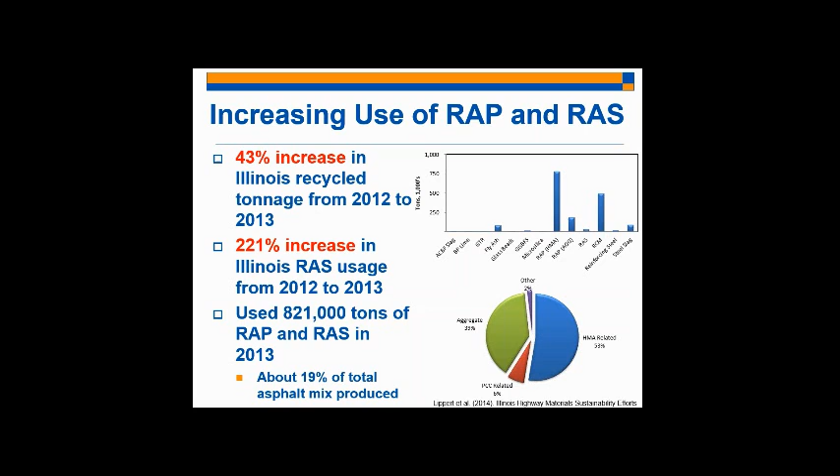Furthermore, in the year 2013, 821,000 tons of RAP and RAS were used, comprising about 19% of the total asphalt mixtures produced. So the point is very clearly made that the usage of RAP and RAS is significantly increasing throughout the United States, but also in the state of Illinois, which motivates the need to understand how this usage of recycled content affects material behavior and properties.

The project goals and overview for the study: we're attempting to identify a testing protocol that can characterize these materials with the addition of recycled content, and we want to identify very critical engineering properties of these asphalt mixtures. The final product is not limited to mixtures that have recycled content—whatever our team is developing can be used for any asphalt mixture in order to screen its performance. But the motivation for the study is the use of recycled content.

The primary distresses are fatigue and thermal cracking. We know that it's typically agreed upon that adding recycled content will embrittle your material, make it more brittle, which makes thermal cracking and fatigue primary concerns. You wouldn't expect rutting to be a primary concern if your mixture is becoming more brittle. This is why these two distresses or failure modes are the primary areas of focus.

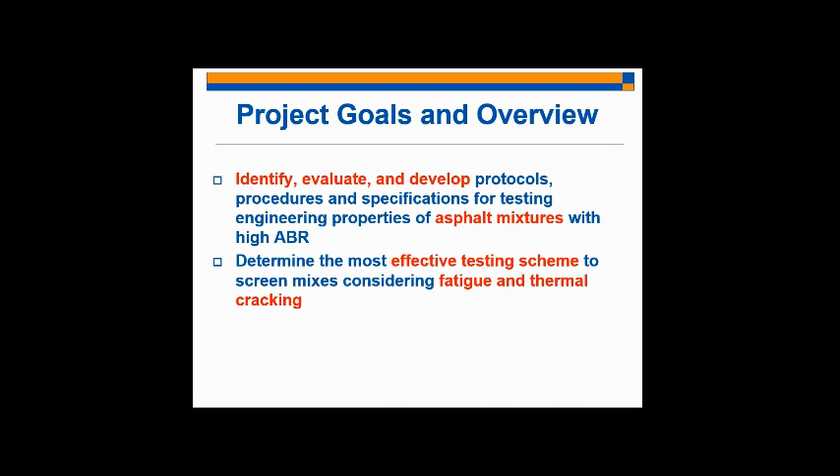When we think about developing this test to accurately screen these asphalt mixtures, there's a set of criteria we must follow. The first is that we have to have significant and meaningful spread in our test output. Regardless of how scientifically sound our research is or how theoretically backed and proven our final product is, if it doesn't do a good job of distinguishing between mixtures which we know are very different—both in terms of mix design and performance in the field—then our test is not very useful.

Second, we want to make sure that whatever product we deliver to the Illinois DOT is feasible, practical, and repeatable. It's very difficult to propose a modification to testing that is expensive and difficult to perform in the field, very complex and time consuming. Whatever product we deliver has to be cost effective, practical, simple, and easy to fabricate the specimens, easy to run the test, and easy to analyze the results.

Additionally, we want appropriate correlation to independent tests and engineering intuition. If I'm expecting, as an engineer with experience, a mixture to behave very poorly, I need my test or specification to tell me that, and I need to be able to correlate results from this specific test method to other independent tests that verify its validity. And then finally, correlation to field performance—this is the ultimate objective. Whatever we put out, the performance you're predicting in lab needs to correlate to field performance, because at the end of the day, that's really all we care about: how is the mixture performing in the field?

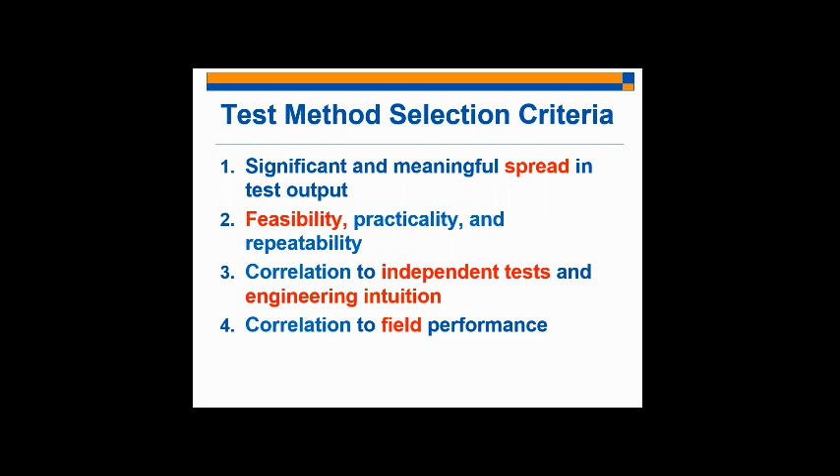Our research approach: how are we approaching this project? We have over, I would say, about 30 plus mixtures that we've analyzed in our lab, and there are three primary sources of material for this project. The first is our plant mixtures, sampled on site in asphalt plants. The second source is laboratory produced mixtures—my colleagues Puneet, Tamim, and Jose have been developing mixtures in the lab.

Been developing mix designs with varying amounts of RAP and RAS, so you can control exactly the mix design properties and see the effect of these different variables on performance. And then field cores that we've extracted from the field and tested in lab.

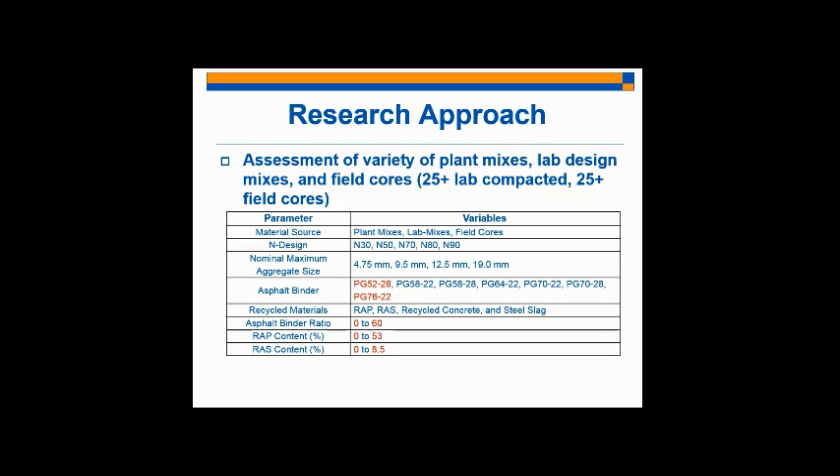We've selected the mixtures used in this study strategically—we wanted as diverse as possible a spectrum of properties. You can see from this table our asphalt binders range from PG 52-28 to PG 76-22. We have a nominal maximum aggregate size of 4.75 to 19. We have N30 to N90 design values. We have all kinds of recycled content in our mixtures—RAP, RAS, recycled concrete, and steel slag. We have asphalt binder replacement percentages of 0 to 60%, so we get pretty high up there. RAP content ranges from 0 to 53%, and RAS content ranges from 0 to 8.5%. We've really pushed the envelope with how different we can make our mixtures, to make sure that whatever flexibility criteria we develop is robust enough to analyze all kinds of different mixtures.

And so, having said this, I present to you the semicircular bending test. Most everyone's probably heard about this test. It's basically a very simple three-point bending test—it's a fracture test.

The specimens are produced from the Superpave gyratory compaction cylinders. You compact your cylinder in the Superpave gyratory compactor, remove the top and bottom portions of the pill, and then extract two 50-millimeter thick slices from the center of the pill, half them, and notch the base of each half. That results in the SCB, the semicircular bending beam test, which you can see in the figure to the top right. It's a very simple test specimen fabrication process, and the most important thing is that we can test these specimens under a very simple pneumatic load frame.

You can see in the picture to the bottom right of the slide the Humboldt load frame. This is actually the load frame used for the TSR test—we've modified the fixture for the standard TSR test. It's a very simple, cost-effective modification, and you can run the test essentially on the Humboldt load frame at a very cheap cost. This is the final objective of the project: to be able to deliver the test that runs properly on the Humboldt load frame.

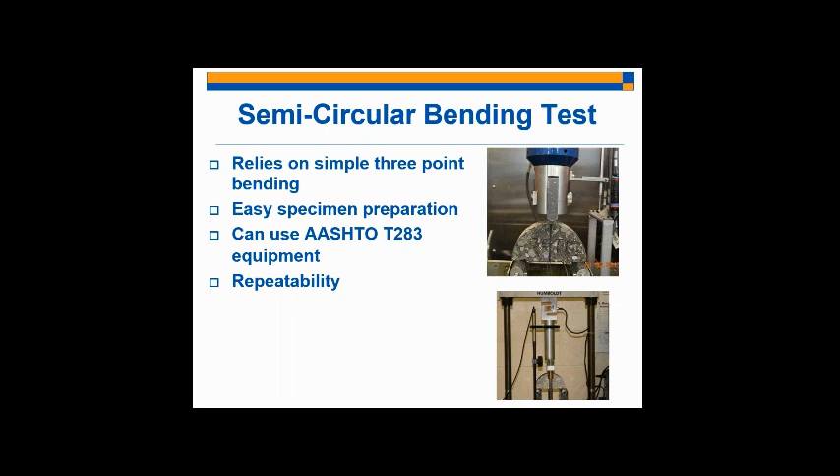In terms of repeatability, we've seen very, very good values, typically below 15% coefficient of variation—actually typically below 10% coefficient of variation. So we've really narrowed down and minimized the variability in this test. Our results are significantly more repeatable than when we started.

A little bit of discussion as to what the SCB test criteria actually is. We've taken the classic SCB fracture energy test, which is run at minus 12 degrees Celsius, and is controlled by the horizontal displacement at the bottom of the specimen. You can see the clip gauge stuck to the bottom of the specimen there.

We've taken that test from minus 12 degrees Celsius, and we've run it at the classic SCB test conditions. But we've shifted the temperature to 25 degrees Celsius, and shifted the displacement control from the bottom horizontal displacement of the specimen, which we call the CMOD, to basically the LVDT. So the test is now controlled by the linear variable differential transformer, shown to the right of the figure. It's basically just a vertical displacement that controls the displacement rate of the test.

After a screening of different displacement rates, we've tried rates ranging from 6.25 to 50 millimeters per minute. We've selected the optimal displacement rate of 50 millimeters per minute, and this provides the best variability, the best distinction, and the best results from the test.

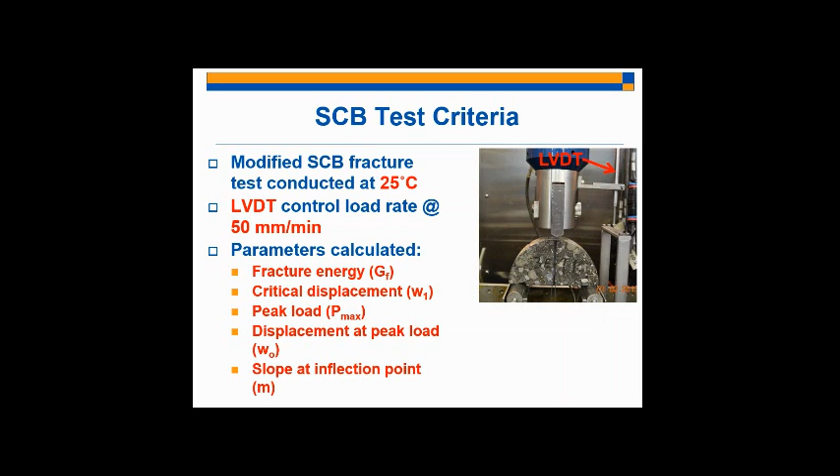The parameters we calculate from this test are as follows. You have the fracture energy, which is typically what's calculated in the classic low temperature SCB test. You have the critical displacement value, W sub 1, and I'll discuss all of these on the next slide. You have the peak load, simply the maximum load your specimen experiences during the test. You have the displacement at the peak load, whatever your vertical transducer is experiencing at the peak load. And then you have the slope at the inflection point, the first inflection point past the peak load, and we call that M.

So what am I talking about here? What typically happens is you get a load displacement curve, and you would calculate the area under this load displacement curve, which results in the work of fracture done. Then you normalize this value by the ligament area, and that gives you the fracture energy. So very simply, the fracture energy is just the area under this load displacement curve normalized by some specimen dimensions.

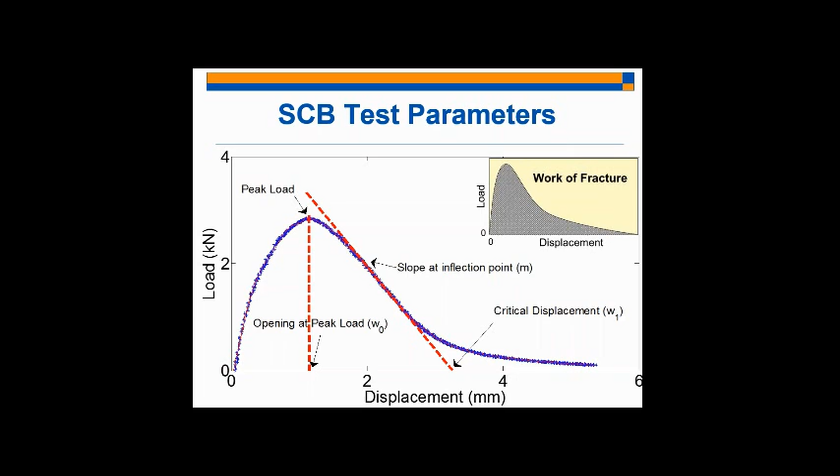We went ahead and ran the test under the minus 12 degrees Celsius SCB horizontal displacement controlled condition, and the following are the results. We have a variety of mixtures ranging from 0% asphalt binder replacement to 60% asphalt binder replacement. The data spread, the range of fracture energy values extracted from these tests, is approximately 250 joules per meter squared. So this is a very limited spread of data.

These are very different mixtures. You can tell simply by looking at the asphalt binder replacement values. Some of them have no recycled content whatsoever. Some of them were replacing 60% of the binder with recycled content. And the spread in our data is not too significant. You can see here that it's very limited, a value of 250 joules per meter squared, which is not too different from the experimental error that we experience.

The bottom right corner of the slide shows the load displacement curves for these low temperature tests. For about 5 or so laboratory produced mixes that we've developed, from 0% RAS to 7% RAS with varying PG grade binders, the load displacement curve is basically identical. These mixes are not performing any differently under low temperature conditions, and they're very different mixtures. You're going from 0% RAS to 7% RAS, which is about 30% asphalt binder replacement.

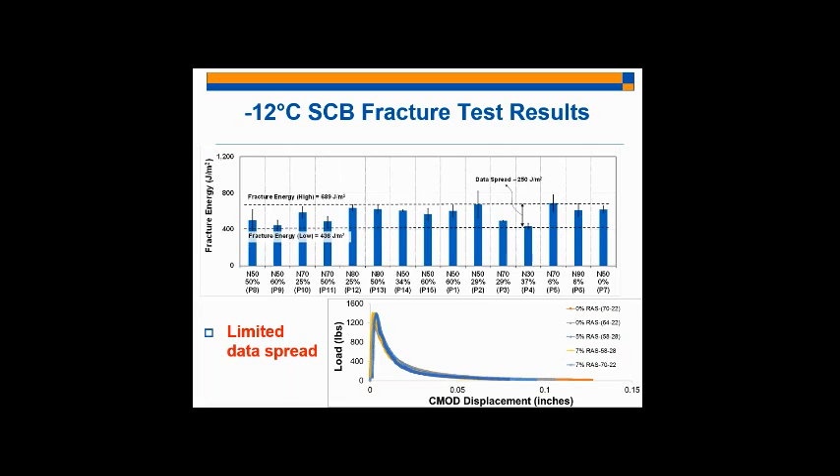So this is the issue with the low temperature testing condition: we don't have significant spread in our data, and we need significant spread if you remember the test selection criteria. Because I know these mixtures are performing differently in the field, and their mix design properties are very different, so with this issue identified, we shifted to basically 25 degrees Celsius.

These are the results for 25 degrees Celsius. Keep in mind the displacement is controlled by the vertical displacement of the SCB specimen. So 25 degrees Celsius, vertical displacement controlled, and same mixtures basically.

Now you see that the data spread has shifted from 250 joules per meter squared to 1,271 joules per meter squared. So there's a significant data spread in these mixtures tested at 25 degrees Celsius. This was a promising result that tells us this temperature is better distinguishing between these mixtures under the SCB testing condition.

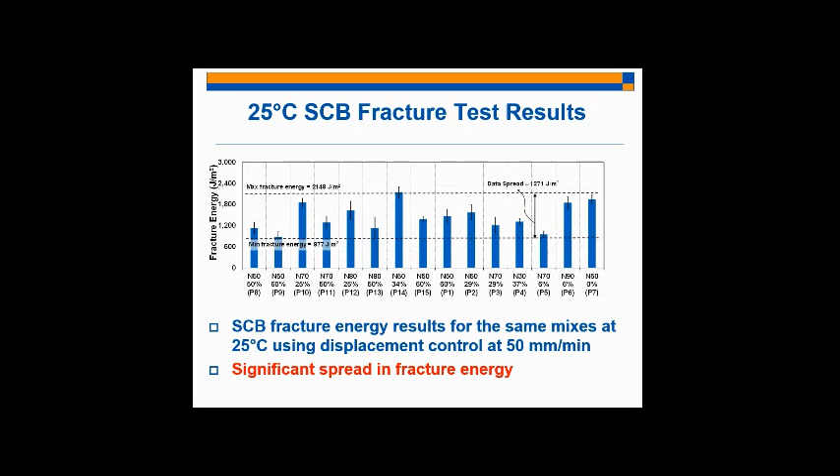Again, these tests were run at the selected 50 millimeters per minute that I discussed earlier. This slide will better visualize the spread in data between the low temperature testing condition and the 25 degrees testing condition. You can see that at low temperature, minus 12 degrees Celsius, there's limited spread in the data, whereas at 25 degrees Celsius, 50 millimeters per minute, we see much better spread in our data, which leads us to pursue this temperature and loading displacement rate for further development of the index.

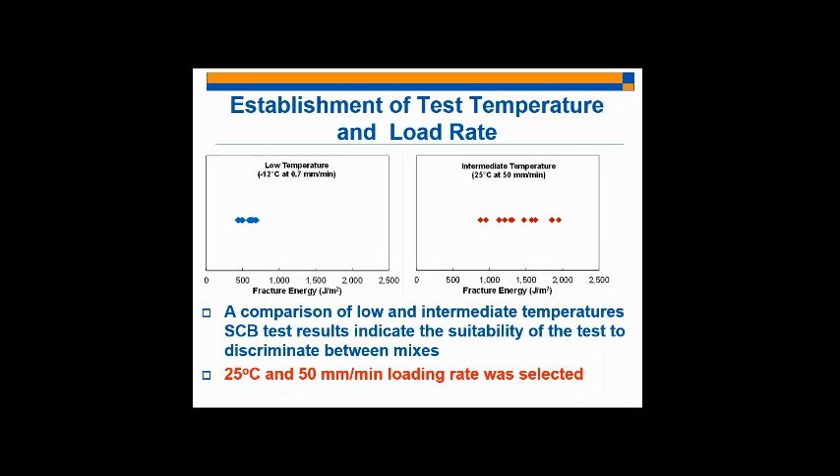So we move on to the shortcoming that we have with the 25 degrees Celsius. We've addressed the shortcoming in the low temperature testing condition. Now we're faced with another shortcoming, and that is that the fracture energy is not a sufficient criteria to distinguish between mixes on its own.

I have here load displacement curves for two very different mixtures. The black curve is our N90 lab-produced mixture, a control mixture with no recycled content whatsoever, completely virgin. The N90 lab mix design 30% ABR is a mixture with 7% RAS. So you would expect these mixtures to perform differently; nobody would argue that they would have similar performance.

And you can see from the load displacement curve that they do behave differently. One mixture, the red curve, which corresponds to the 30% ABR, is significantly more brittle. It's less ductile and displays a higher strength or peak load value, where the control mix displays a more ductile, lower peak load, lower strength value.

But if I look at the fracture energy, which is the criteria typically used to screen or grade mixtures, the black curve displays a fracture energy of 1790 joules per meter squared, and the red curve displays a fracture energy of 1780 joules per meter squared. So I've selected these two curves to show that even at 25 degrees Celsius at 50 millimeters per minute, I have two very different mixtures with practically identical fracture energy values. If our objective is to distinguish between mixtures, then fracture energy is not sufficient on its own.

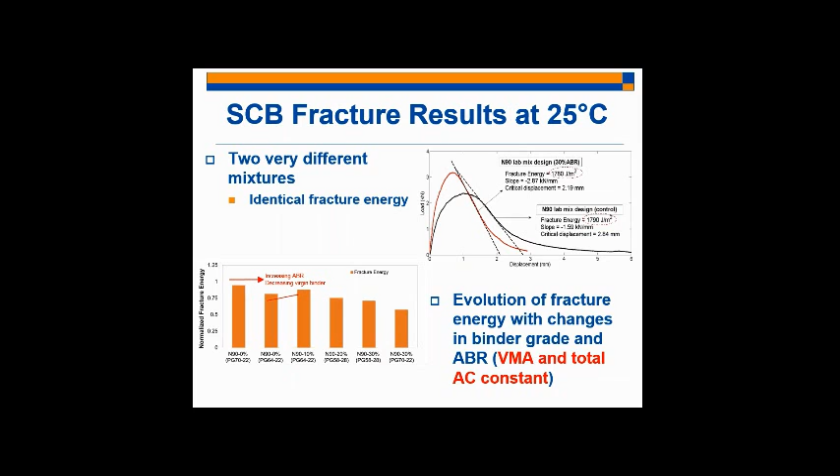I'm trying to move this out of the way, but it's not working. Okay, okay.

With this motivation, we have a two-pronged approach to addressing these potential concerns. The first prong is the finite element simulations, or FEM work, which my colleague Ziad is doing. The second prong is the DIC, or digital image correlation. So the DIC work, if I can move to the next slide.

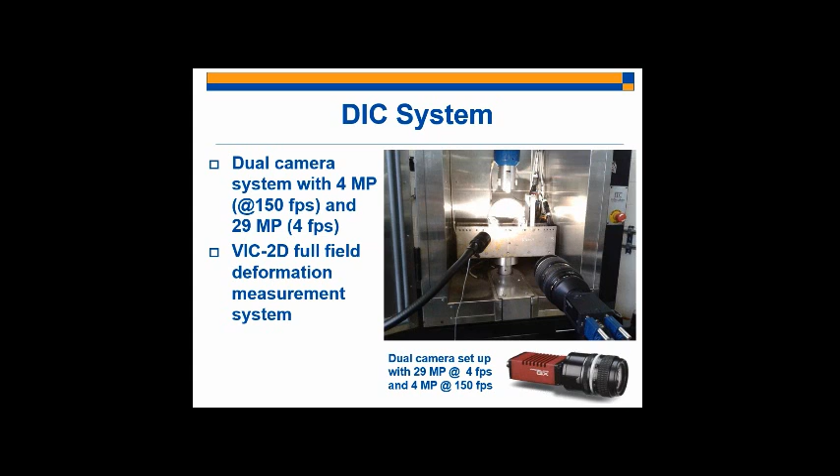So what kind of things can we do with this DIC that we couldn't do with just the raw data extracted from the test? We can look at the effect of rate and temperature on fracture. We can look at the aggregate microstructure and quantify its effect on fracture energy results or displacement results.

We can look at the effect of recycled material content being added to the mixture in a way we wouldn't be able to see with just the raw data extracted from the test. Additionally, we can address the aforementioned issue of spurious inelastic displacement, which is not related to the fracture but could be added at 25 degrees Celsius.

Finally, we can extract viscoelastic parameters such as the J integral, the stress intensity factors, and perhaps most importantly, the fracture process zone. We can do all these things with these cameras that we wouldn't be able to do with just the data extracted from the test or our own visual assessment of the specimen as it's being tested.

So I wanted to discuss the fracture process zone exploration that we've been doing with these cameras.

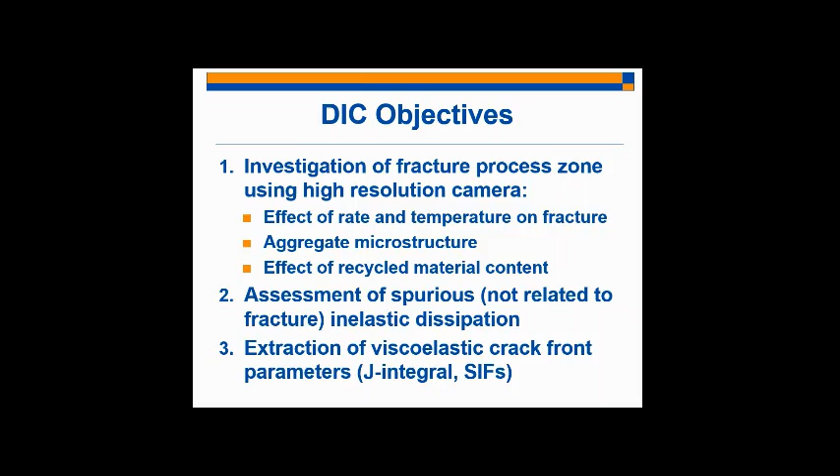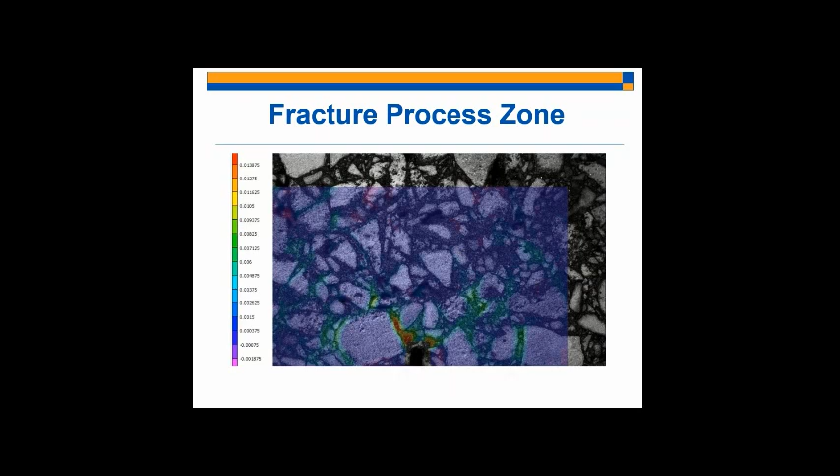I wanted to show it again. She's calculating the strain fields as the test is progressing, and you can see the development of the fracture process zone there.

We've looked at the fracture process zone for different testing scenarios. We first tested the same mixtures, our 0% RAS, at minus 12 degrees Celsius, the classic SCB testing condition mentioned earlier, and at 25 degrees Celsius, 50 millimeters per minute. You can see the difference in the fracture process zone. At minus 12 degrees Celsius, the lower temperature, the fracture process zone is kind of limited to the crack tip region. It's not really extending much past the crack tip.

At 25 degrees Celsius, there's a kind of diffusion of the fracture process zone further out into the specimen, and you can see that it's much more prominent in regions further away from the crack tip. So we can conclude that the effect of shifting the temperature from -12 to 25 Celsius is a diffusion of the fracture process zone.

We hypothesized that basically in the field, what's happening is something similar to the 25 degrees Celsius testing condition, where the fracture process zone is much more diffused throughout the bulk regions of the material, of the asphalt pavement.

Then we took our control mix, which is 0% RAS, and we tested its deteriorated derivative, which is the 7% RAS, tested at both -12 degrees Celsius and 25 degrees Celsius. So you can see we can make an apples-to-apples comparison between the control mix and the 30% ABR, or 7% RAS mix, at both -12 degrees Celsius and 25 degrees Celsius.

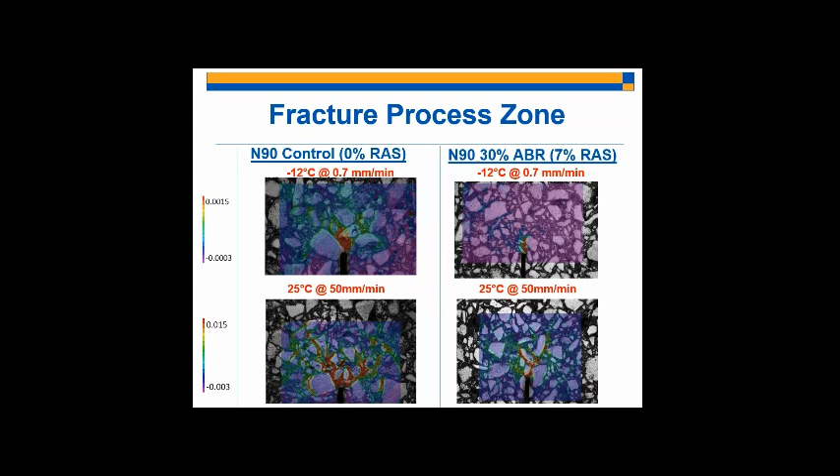So, going back to the development of the flexibility index, having begun to address all of these potential complications that come from 25 degrees Celsius testing temperature, we proceeded to the development of a flexibility index.

I should mention that the FEM work we're doing has preliminarily shown us that these spurious inelastic energies we're concerned with comprise less than 10% of the total fracture energy values we're getting. The work is still ongoing and we'll further prove this, but we feel very confident that the spurious inelastic energy contributions are not too significant.

10% is within the experimental error of our own experiments, which is why we're not considering this value in our tests.

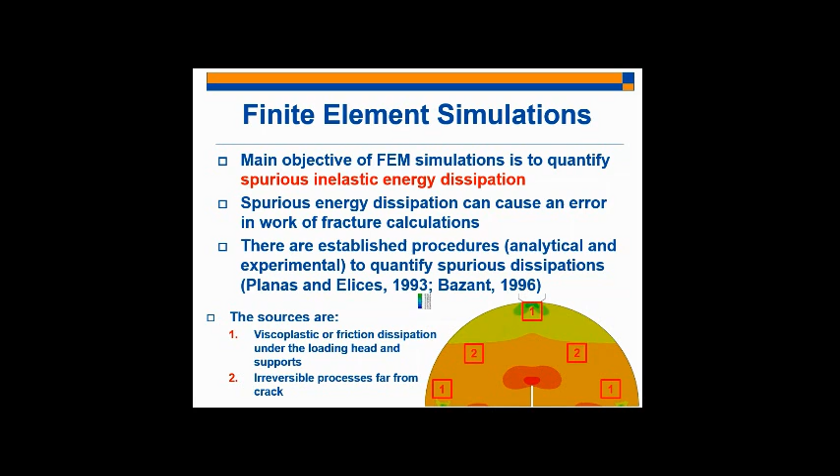Moving on to the developed flexibility index, what we did is we took a step back and looked at the critical parameters I discussed earlier, and asked: how can we characterize different materials, and how can we distinguish between different materials?

The result we came up with was purely geometrical. We found the answer in the geometrical properties of the load displacement curve. The fracture energy is just a geometrical characteristic of the load displacement curve, but there are other parameters you can extract, such as the peak load, the slope at the inflection point, or even the critical displacements.

What we found to be most effective and most in line with engineering intuition, preliminary prediction of field performance, and independent tests, was this combination of the fracture energy and the slope - the slope of the line fit through the first inflection point past the peak load. Let's talk about the structure of this index a little bit.

The higher the slope of the load displacement curve - the slope of the line fit to the first inflection point past the peak load - the more brittle my material is. So the higher my slope, the more I can penalize the mixture for behaving in a more embrittled fashion. The fracture energy we included because it still tells us something about the behavior of the material.

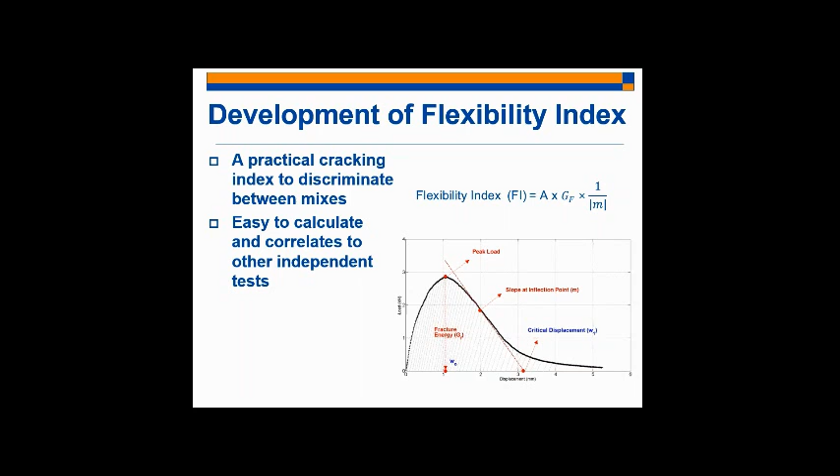So let's go back to the example I showed earlier of the two load displacement curves, of the two very different materials that were displaying basically identical fracture energy values. You had 1780 joules per meter squared and 1790 joules per meter squared.

When we run these numbers through the flexibility index expression we proposed, you can see the huge distinction between the two mixtures. The red curve, the more brittle, lower performing curve in terms of low temperature fracture resistance, displays a flexibility index value of 6.2. Whereas the black curve, the softer, more ductile curve of the lab mix with 0% RAS, displays a flexibility index of 11.3 for its fracture performance. So the black curve is displaying a significantly higher flexibility index than the red curve.

And so the distinction is then made. These two mixtures are distinguished using the flexibility index, which was not possible before using fracture energy.

So then we looked at the performance of all our laboratory mixtures. If you remember, the lab mixes I discussed earlier started with a very good parent mixture of an N90, 0% RAS, PG70 minus 22, which is polymer modified. Then we bumped the binder down to a softer binder, and added different amounts of RAS, basically making the mixture worse and worse.

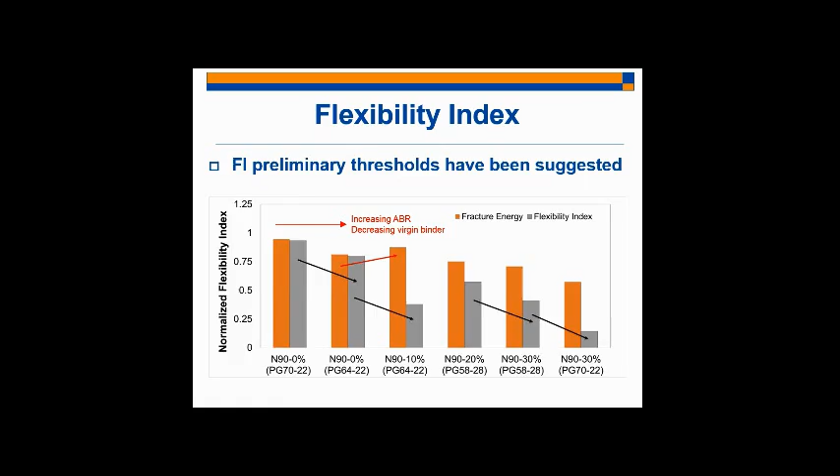As I move further towards the right, I would expect my mixture to be a better performing mixture. And as I move further towards the left, I would expect basically degradation or deterioration in the performance of the mixture. So if we look at some examples...

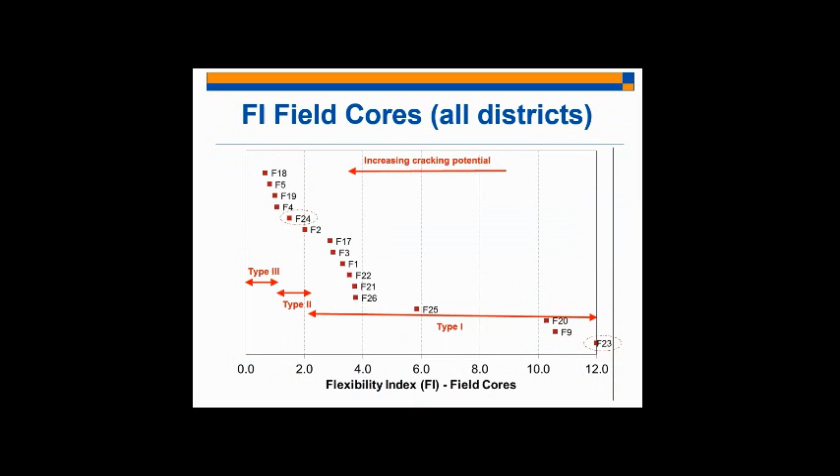So I mentioned the three categories: type 1, type 2, and type 3. Essentially, if your mixture falls in the type 3 region, which is all the way to the left of the flexibility index spectrum, then you would basically reject the mixture due to high early cracking potential, and you would redesign. You would make modifications to the mixture and then rerun the test to see if this mixture still falls in the type 3 region.

If your mixture falls in the type 2 region, the mixture would be acceptable, but kind of mediocre performing in terms of low temperature cracking resistance. And then the type 1 mixture is the acceptable, excellent performing mixture, which can be used in surface overlays or typical pavement applications.

We aren't considering, per se, structural or application variations in these mixtures. So I'm not saying that if you have a road with lower traffic levels, then you would take that into account as you basically decide to pass or fail the mixture.

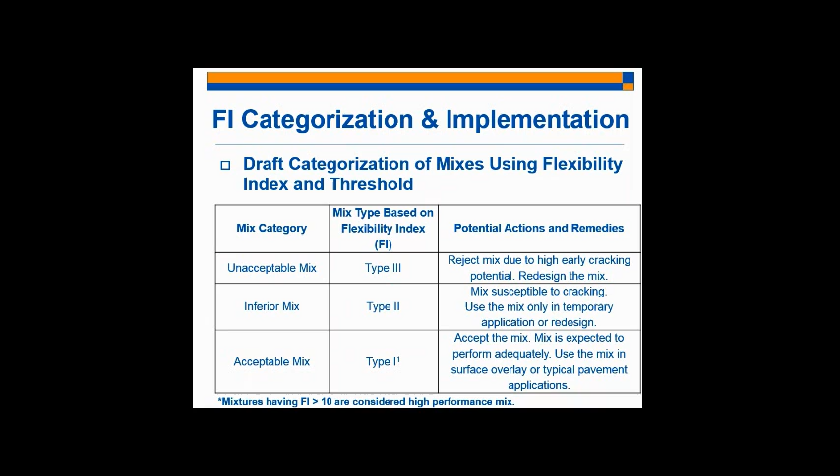I mentioned correlation to an independent test - the correlation of our flexibility index test to an independent test. So we selected the Texas overlay test for that correlation. The Texas overlay test was developed by Zhou, and it's a qualitative test. It's conducted at room temperature, 25 degrees Celsius, like our proposed SCB, at a displacement of 0.025 inches and 1 hertz loading frequency. And recent studies show that there's very good correlation between this test and field performance.

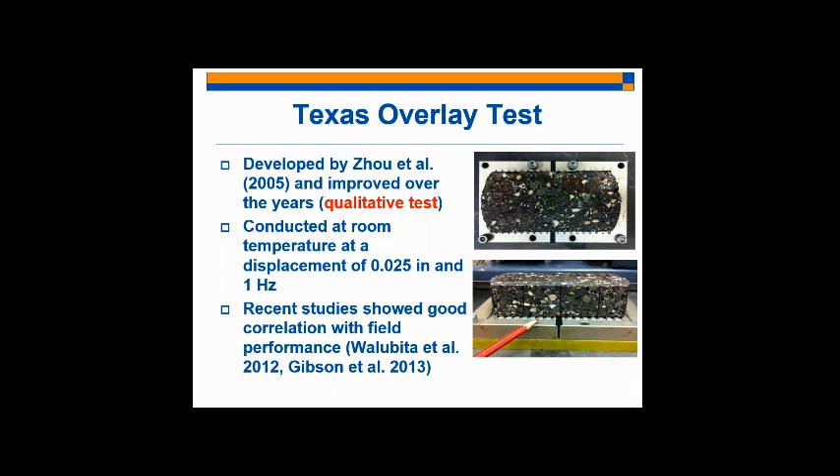So what we did is we tested our mixtures under the Texas overlay test with the help of IDOT, and we've also tested them under the SCB. There are seven primary mixtures included in the study, ranging from 0% RAS to 3.5% RAS, from 0% RAP to 50% RAP - so very different mixtures.

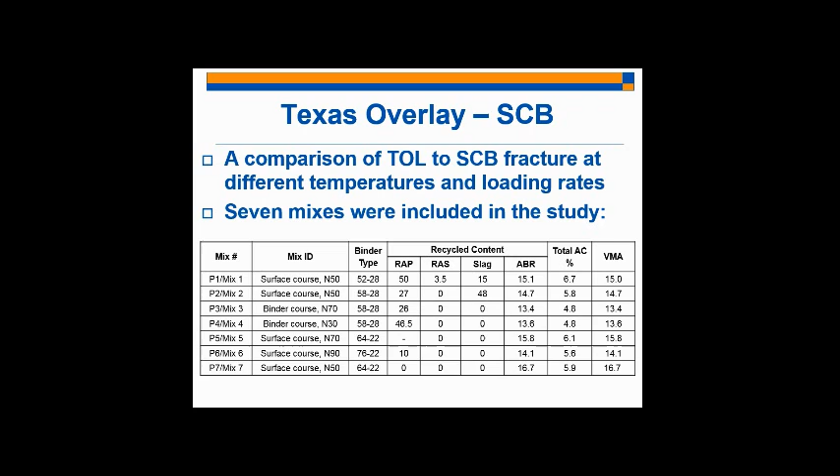Even though there's only 6% ABR in P5, something went wrong in the mixing, compaction, or production of the mix that we don't know. It's interesting because IDOT's TOL test cycles to failure matched ours. This mix 5 is one of their lowest performing mixtures for a reason we're not sure of yet. They're conducting forensic studies on this, but it's one of the lowest performing mixtures in both datasets.

For our best performing mixture, there's a correlation with their best performing mixture, mixture P7. So the two extremes of these two tests are matched - good mixtures match and poor performing mixtures match. There wasn't such a great match in the middle region between good and poor performing mixtures, but we can say the extremes, the very different mixtures, are identified in both the SCB and the TOL cycles to failure.

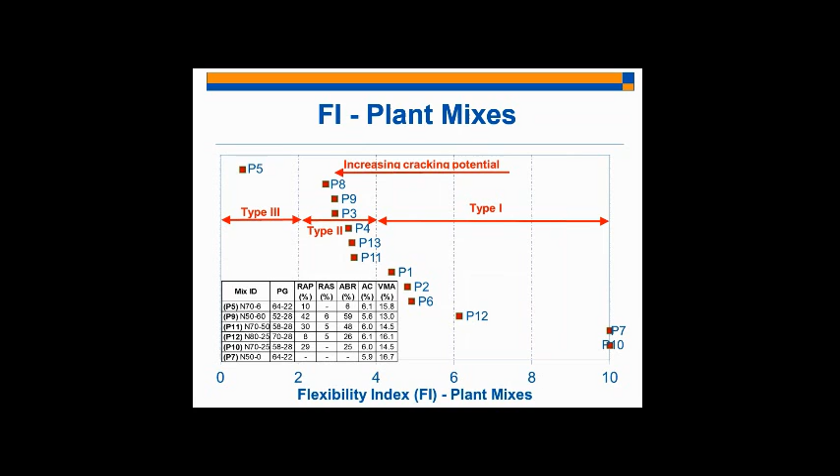Right. Well, if you look at P2 and P5, if you compare P2 and P5 results from the Texas overlay, they're not too different. So I would say they're kind of in the same performance range.

There are some issues. They're similar for that test you're trying to compare it to, but then they're no longer similar for the SCB. It's a very limited set, so I don't want to be too critical of some of those, but again, it might be a fairly bold statement. I would repeat or emphasize that it's just the extremes that we're comparing, and there are some issues with the Texas overlay test.

The statistical analysis that you made. Right. So when we ran this through stats analysis, I'm not showing the error bars here, but the categorizations of the different materials for best performing and poor performing did match through statistical analysis.

Maybe for example, the P2 mixture has a very high error bar, whereas the P5 mixture has very low variability, talking about the TOL test. So I did run the results through statistical analysis, and the outcome was that the two extremes matched. I'm not saying the tests are interchangeable or that you can use one to predict the performance of another, but it is a confirmation that our test is at least able to match the Texas overlay at the extremes.